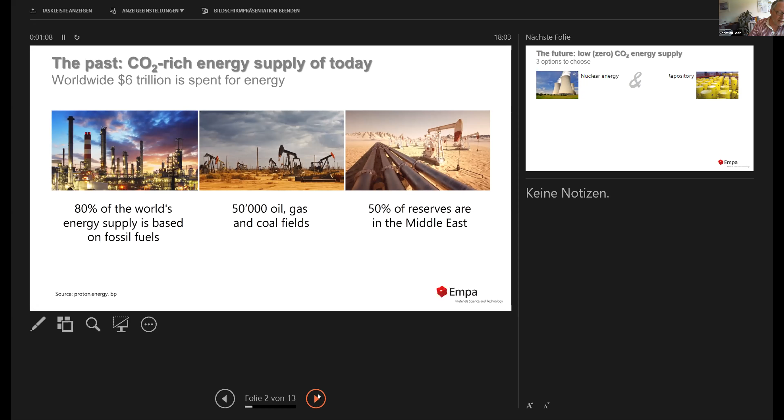Yeah, let's start. I would like to start with a very general overview that shows a little bit what I'm trying to explain in a minute. So this is our actual CO2-rich energy supply. It is chemical-based, cheap, stored energy. Unfortunately, it works very well, but we have all these CO2 emissions.

And what we have to do is to change to renewable energy, and there are mainly three options. One is nuclear energy, but we need a repository for the waste. And in Switzerland, we found this is a very difficult issue, and also the technology is not really accepted. This means this option is not really available for the next couple of decades.

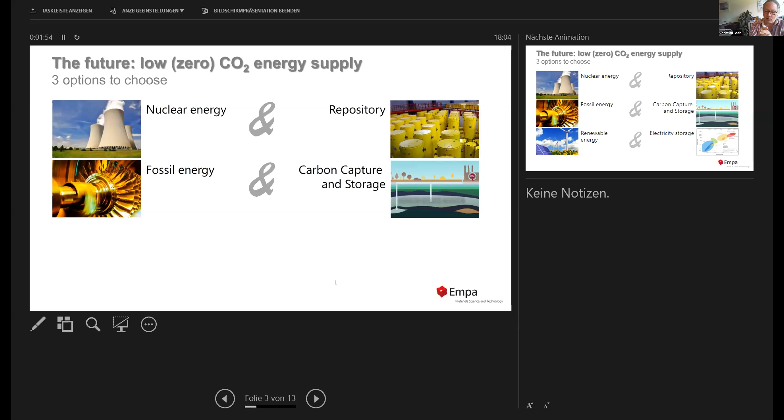Then we have a second option. This is to further use fossil energy, but to capture carbon or CO2 emissions and store them in the underground. This is a part of the research, but also has similar discussion. So maybe the technology is available, but the acceptance is not clear, and also the costs are not very clear. However, fossil energy will not remain forever, so maybe we will not find enough investors to invest in this technology. So maybe this technology is not available also.

So we may remain only with renewable energy. And of course, renewable energy has a fluctuating character, and we aren't successful without a lot of electricity storage. But there is one main difference between these three technologies. While for nuclear energy and fossil energy, we can start producing energy and say the repository and carbon capture and storage we will do later, this will not work with renewable energy.

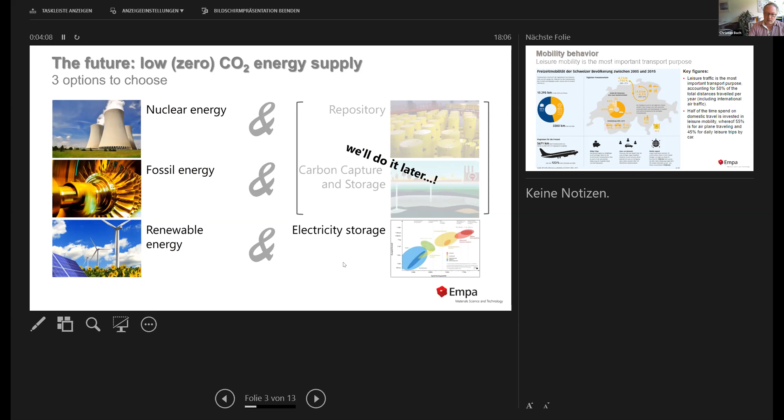However, mobility is a very heterogeneous issue. Leisure mobility is one very important issue. This is hard to control because sometimes leisure mobility is related to special transports or to long distances, and all this makes it very difficult. And if we switch to a more renewable mobility, for example electric mobility, but then vacation traffic is done by airplane, we do not win anything. We always have to care about the whole issue.

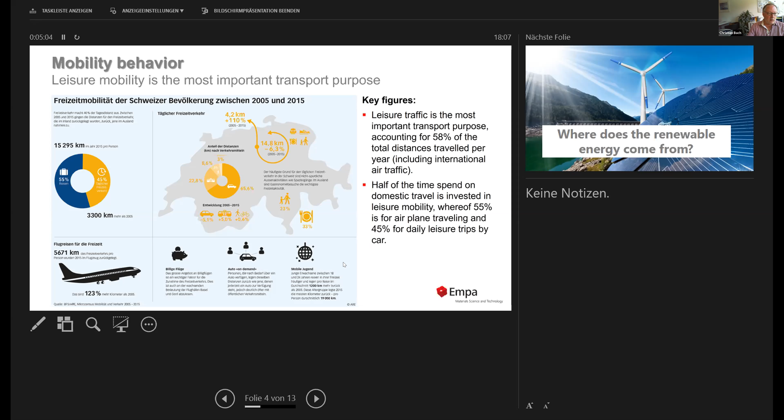But I would like to go to two things: where the renewable energy comes from, and what powertrain technologies we need. When we look at the CO2 emissions of different powertrain technologies, here you see internal combustion engine vehicles with gasoline engines, hybrid, plug-in hybrid, fuel cell vehicles, and battery electric vehicles. These are data from the Paul Scherrer Institute carculator software, and we see the most important issue is to switch from fossil to renewable energy.

If we compare fossil-operated vehicles, they are always similarly high. And if we compare renewable-energy-operated vehicles, they are always similarly low. But they are not at zero. We still have emissions, so we should always think about including negative emission technologies.

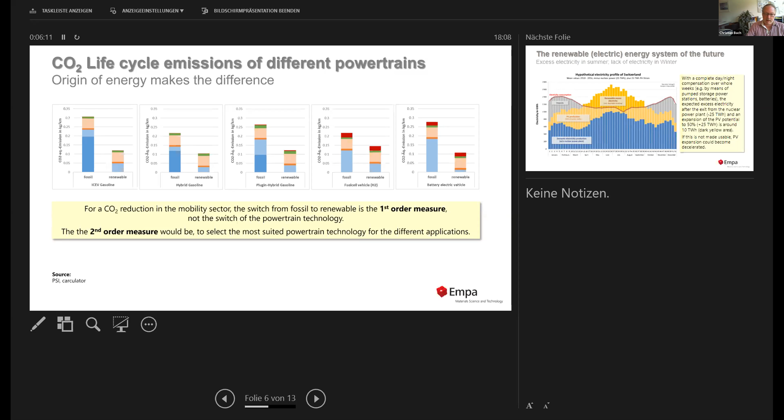Now, when we modify our energy system, we will maybe end up at something like this. Blue color means hydropower in Switzerland, with a peak in summer. The yellow color means photovoltaics. And here, 50% of the well-suited roofs are equipped with photovoltaics, which is about 25 terawatt hours, and this replaces 25 terawatt hours of nuclear power.

So within this diagram, we see what is desired maybe in 2050 when we install 25 terawatt hours of renewable electricity, or photovoltaics. We will then see a lot of excess electricity in summer.

And today we also have excess electricity in summer, but we can export it to other countries. But in 2050, maybe the northern part of Italy and the southern part of Germany will have excess electricity at the same time. And then if we do not make this electricity usable, maybe the photovoltaics will not be installed.

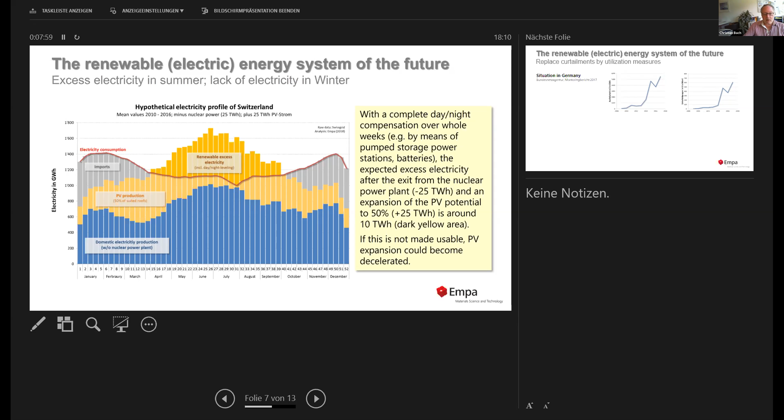When we look at the situation, for example, in Germany, we see that the excess electricity, this is electricity which is curtailed, is increasing over time. So in Germany in 2017, they curtailed 5,500 gigawatt hours of electricity, and they paid 600 million euros for this not produced electricity.

This is good for the electricity plant operator because they have the revenue even if the electricity is not used, but I think this will not work forever. In our opinion, it is better to spend this 600 million euros to make usable these 5,500 gigawatt hours of renewable electricity.

And we have a similar situation in China. For example, we look here at the full load hours of solar energy. So within a couple of years, it has decreased by 20%, not because the sun is shining less in China, but because the photovoltaic systems are more and more producing excess electricity.

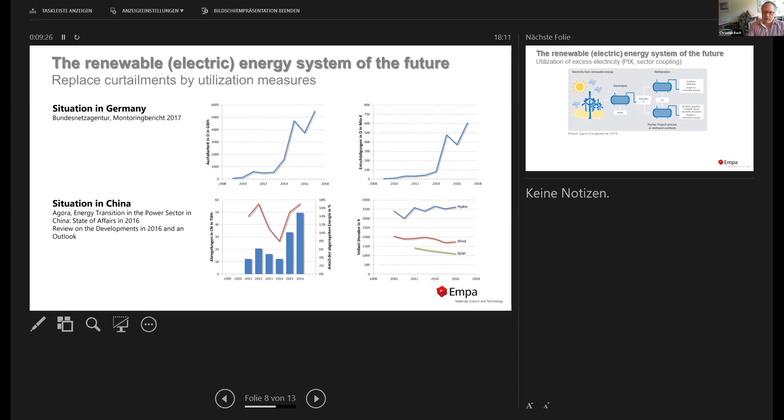That's the reason why we think we need hydrogen and synthetic hydrocarbons because of this excess electricity. Of course, the most important thing is always to use electricity whenever it is possible, but it is better to convert it to hydrogen than to curtail it. And also for long distance transport, we think it is easier to convert it to methane, even if we lose some energy, but then we have a transportable energy carrier.

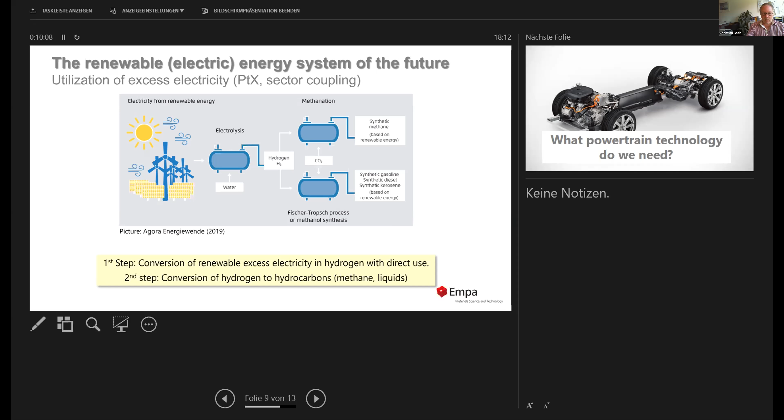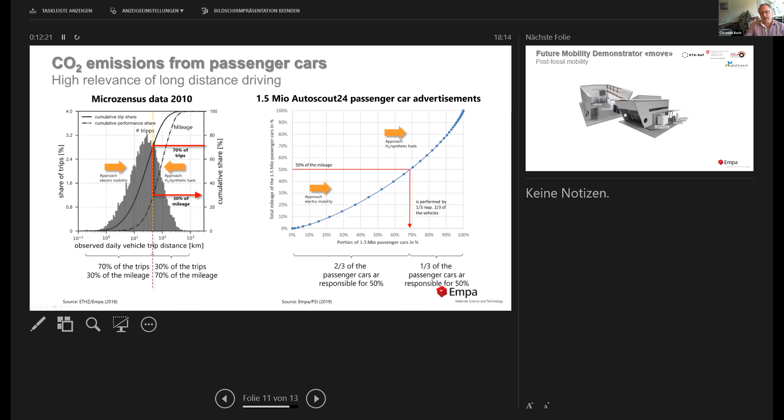And from our point of view, for most cars, we think electric mobility is the most suited powertrain technology, while for the long distances, hydrogen and synthetic fuels will become more interesting because we need less infrastructure.

However, the most important thing is to ban fossil energy and to allow in future only renewable energy.